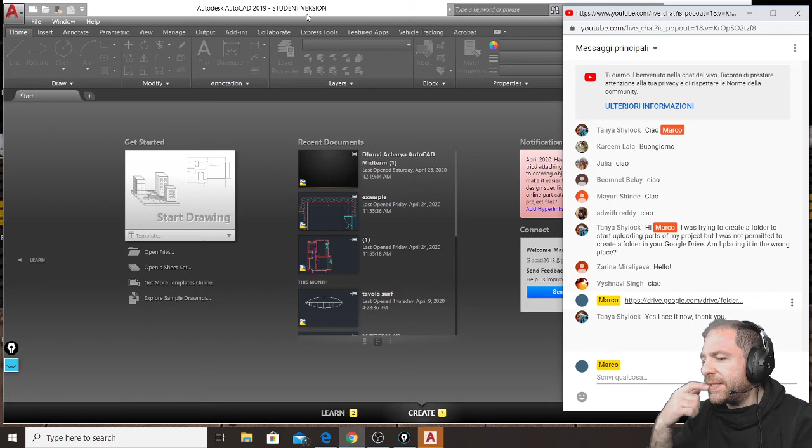Something else? Do you have doubts, things that you want to ask me? Because in the meantime, I can make a new file. It is time today to explain sections. So let me know if you have questions, because if not, I will show you the concept behind, like we did last week. I will really draw a lot on the board before doing the operations in AutoCAD.

Should we also place the furniture in the plan? Of course, yes. You have to place furniture, and you can use, for example, blocks for furniture. You can download them and use them inside your floor plan. You can't just make a floor plan and say, this is the kitchen. We need to see how the kitchen works, so where is the sink, the fridge, and stuff like that. Okay?

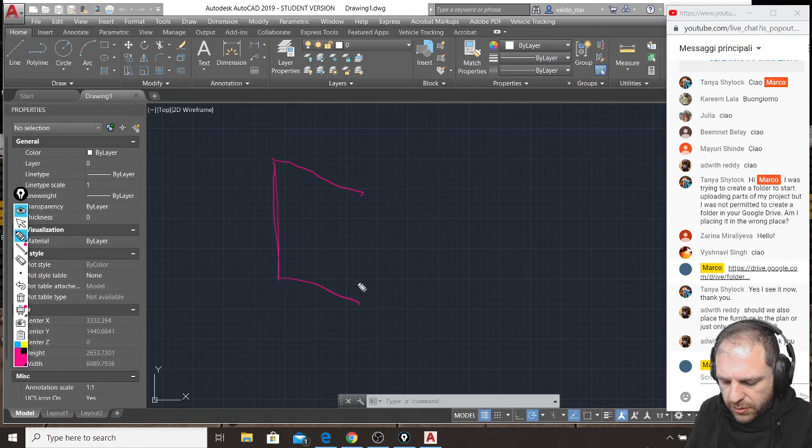First of all, what is a section? A section is nothing else than an elevation, so the concept is the same. The only thing that changes is that instead of being outside an object, the section is an elevation made by being inside that object. So the real difference between making an elevation or a section is only this. Let's make a pyramid, it will be more visible. So let's say you have a pyramid.

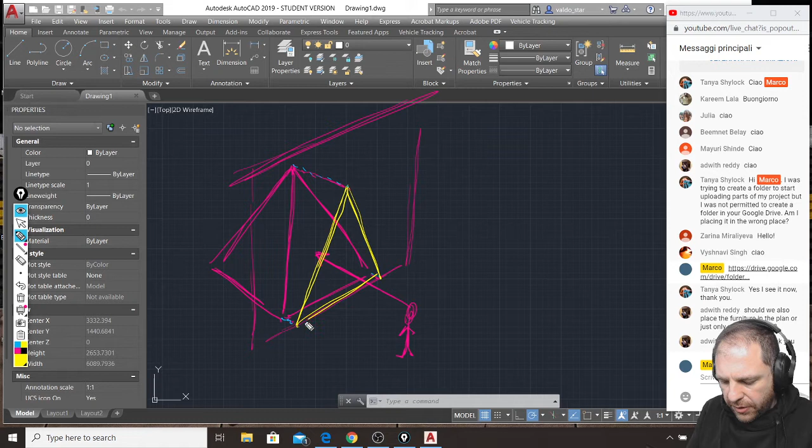If you make an elevation of the pyramid, imagine that you are here. This is your viewing direction. Because the paper where you draw is on a plane perpendicular to your viewing angle, making an elevation basically means projecting these vertices on your viewing plane, and you will see a triangle as the elevation of this pyramid. This is simply because you are outside the object, and your visual plane is outside the object itself.

No! The pen fell on the ground. Give me a second. Where is it now? It's there. It's a disaster. Sorry for the real-time inconvenience.

So I was saying, this is called elevation.

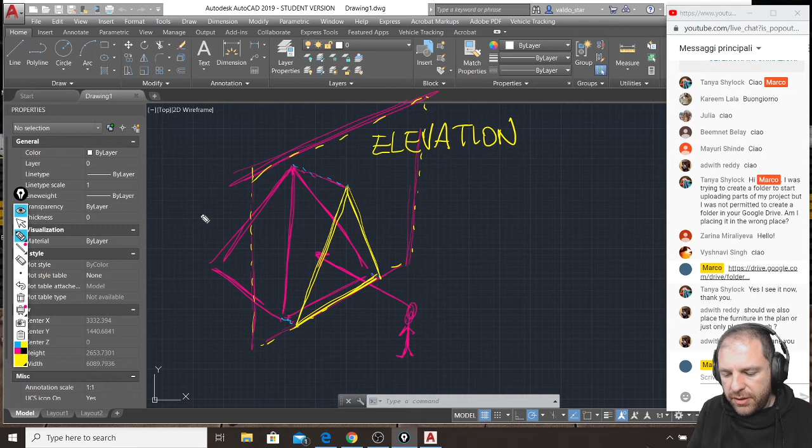What happens when I want to make a section? Believe it or not, the concept is the same. The only thing that really changes is where this plane is. So, check this. I make again my beautiful pyramid. This one.

I place myself standing in front of the pyramid again. So again, this is my viewing direction. The only thing that changes is that now, just by making another color, my viewing plane that is still perpendicular to the viewing angle is intersecting the pyramid. So basically it is cutting this pyramid here, and the intersection between the pyramid and the plane is something that happens here, let's say.

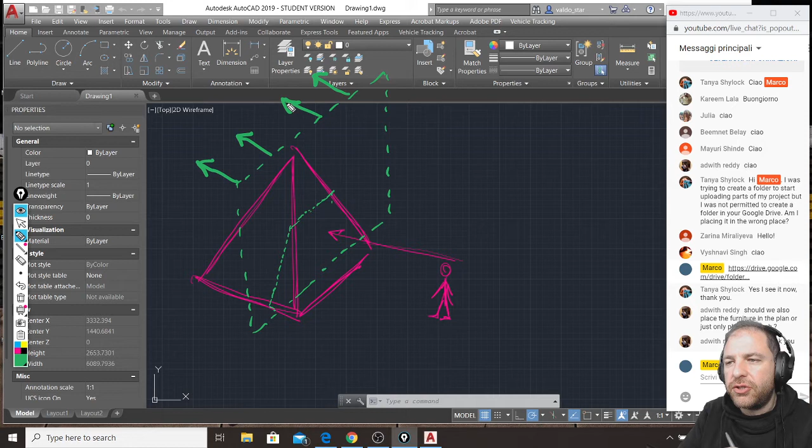So what I see when I make a section is that I won't see whatever is in front of my section plane, and I want to see whatever remains behind my section plane. So what happens is that because there is this intersection between my plane and the pyramid, I will start viewing this as an elevation. But in here, I will see my pyramid cut like that.

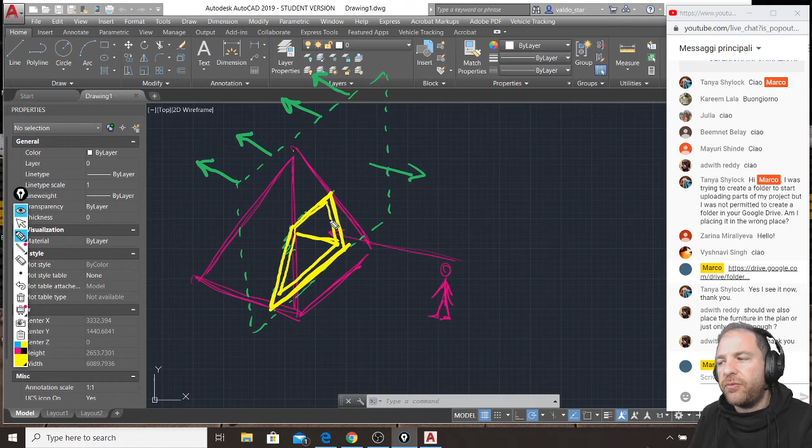And if, for example, the pyramid is hollow inside, I will see what is inside the pyramid, or the element that I have in front of me. So, what happens when we turn this concept into a technical drawing? It happens simply this. We don't draw in 3 dimensions, we draw in 2 dimensions.

So when we, let's say again, have our pyramid and we see it from the top, the pyramid looks like this. We are here, and I will draw the plane in a very precise way. That is, I will draw it with a dash dot line. So when I make an elevation, my point of view is here. I look at the pyramid from here. So when I make an elevation, this is my vertical plane.

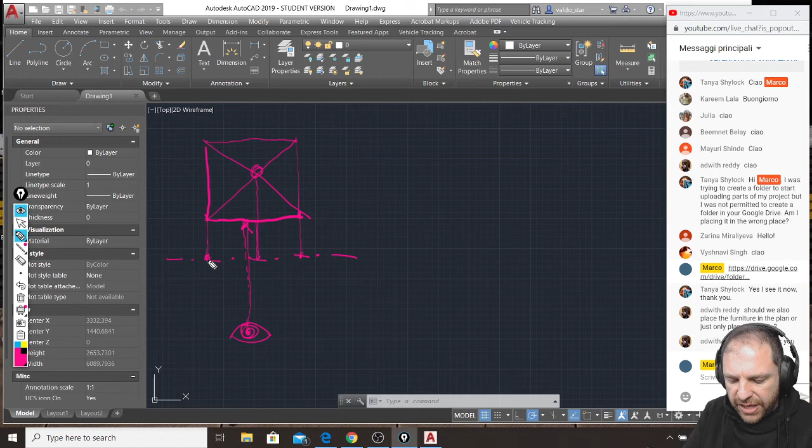I project these points like that, and this will be this point, this is this point. I should know how tall the vertex is so that my elevation becomes a triangle. When I make the section, the only thing that changes is that my dash dot plane is not outside, but it is cutting my object.

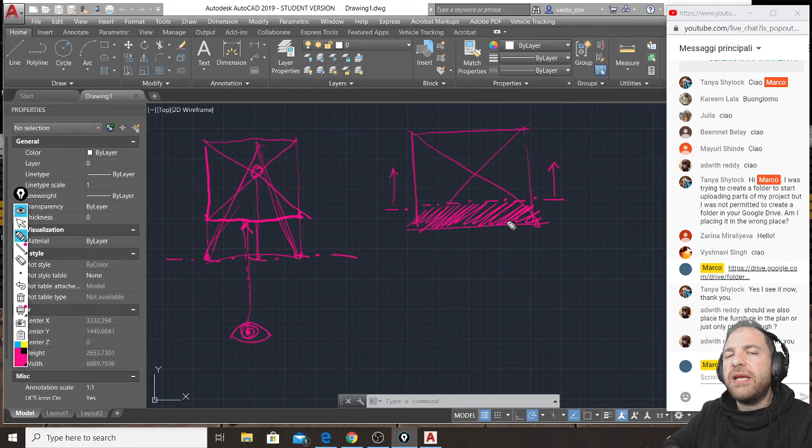So what happens is that I will see whatever remains on this side of my cutting plane, and I imagine that whatever remains in here is gone forever. So when I go to make my projection and I am in this situation here, I have to project only elements that are visible, that are in front of these, and I have to forget whatever is there.

So I will not project these vertices anymore, but I will project this intersection here, this intersection there. I will project this point because I can see it. I will project these, and I will project that. In practice, making a section is like an elevation, just with this additional information.

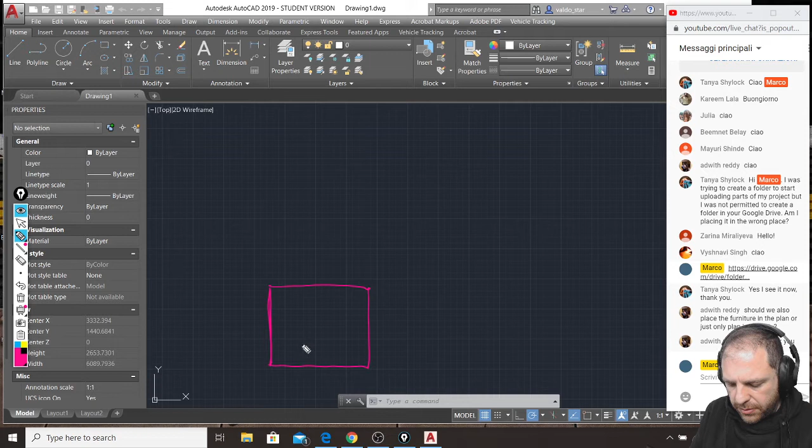So, if I have an object, and again, I just draw it down here, and I see it from the top, this is the pyramid. This is my cutting plane, and I place it here. Mechanically, the steps that I have to do are the same exact steps that I showed you last week for elevation, and we have seen the elevation of a stair. This is the same. The only difference is that I will do this.

On the section line, I will add 2 arrows to specify which side of my object I can see, so the one where the arrows are pointing at, and I will specify which part I'm not able to see. Starting from this simple point, like I did for elevations, I will make a ground line.

And a ground line must be perfectly parallel to my section line. So if the section line is horizontal, my ground line will be horizontal. If my section line is vertical, my ground line will be vertical. But they must be parallel.

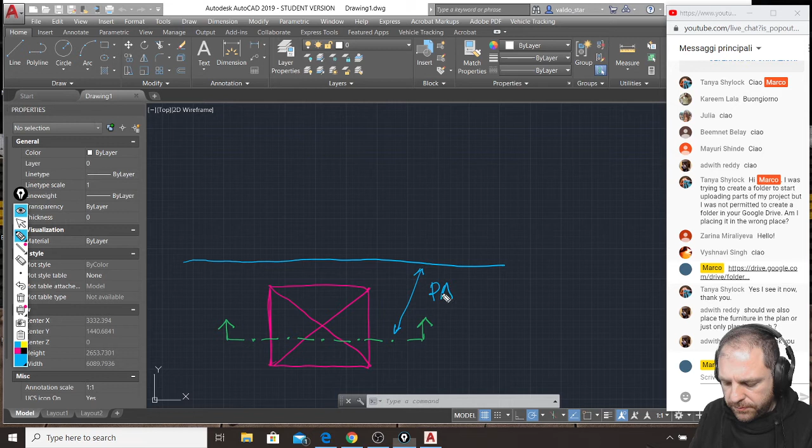Then what I have to do is see which are the points that my section plane is intersecting. My section plane is intersecting this, and this, and I will project them by using perpendicular lines to my ground line.

But besides having cut points, I also have this vertex. There is something that is behind and is in front of my section plane, so I can see it, and I will project this thing as well. So what happens is very simple.

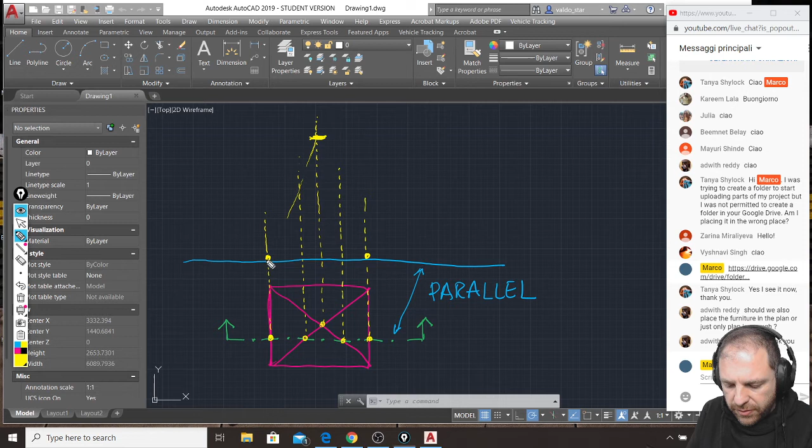It happens this. What I have to understand is that my pyramid, let's say, will have this height, and the pyramid is touching the ground here. So I should expect that the shape of the pyramid will be like this.

But there is something more. From this part, something is visible, and this visible part is basically what remains from my vertex till this point. That is the projection of these 2 points there. So this is something that I can see. So it will be a small part of an elevation, while in here this will be the section of my

pyramid. And when I draw it, I will draw these with a thin line, and I will draw, let's use another color, I don't know, this one, no, green, I haven't used green, and I will draw this part as the cut element of my pyramid.

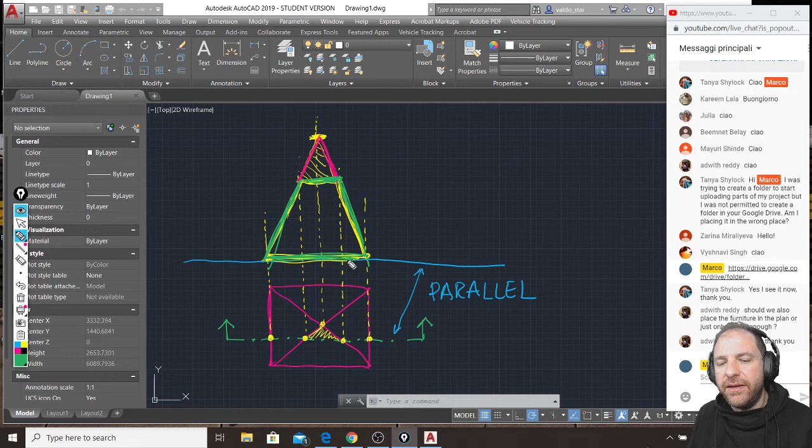If we do this and we apply the same concept to a house, it would be unbelievable. Let me show you first in 3D, then in 2D again. If we have a house, what is technically called the section will be the green part, but the drawing that is called section in technical drawing is whatever is cut plus whatever is visible. So you have to draw both elements. I will show you better with a house example.

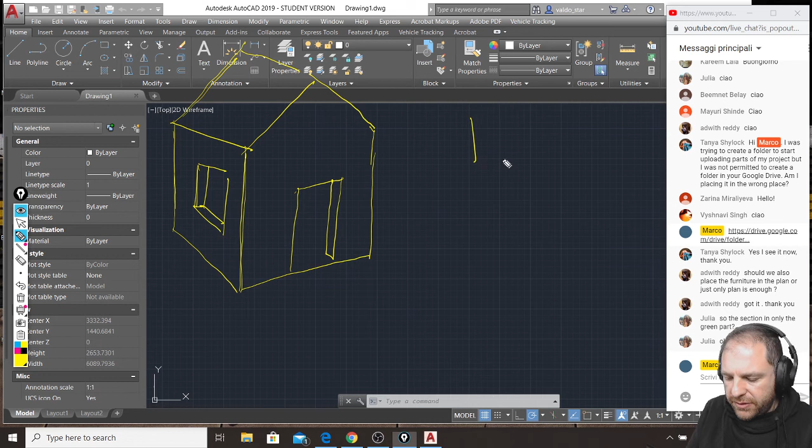But see this. This is your house. If I make an elevation of this house, it will be very simple because it will look like this. I can just see this front face. If I make a section, let's say my section plane is cutting the house in half, and the intersection between my section plane and the house is cutting the house like this.

It goes on the other side, so it goes inside the house. I will see roof thickness. I will see this other part of roof thickness. I will see this wall. I will see floor thickness, and I will see this. So this is where my section plane is cutting my architectural object.

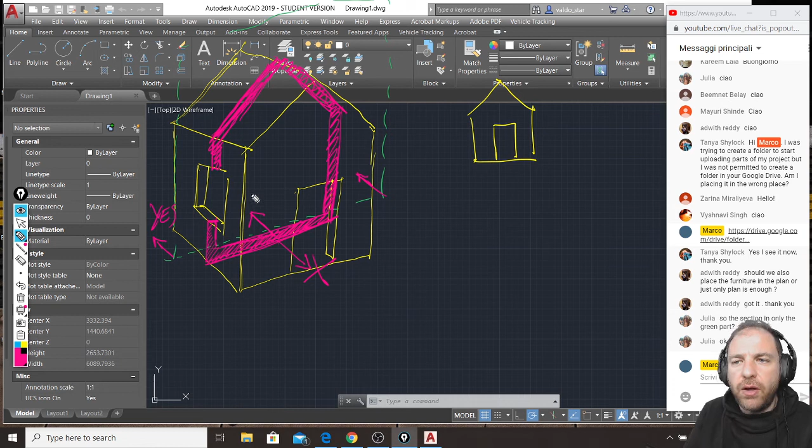But if I have things that are on this side of the house, I won't draw them. But if I have elements on this side of the house, that is the direction that I have set for my section, so here no, but here yes. So if I have a table in front of my section, I have to draw the table, as well as the edges of my window that I can see, even if they are not cut.

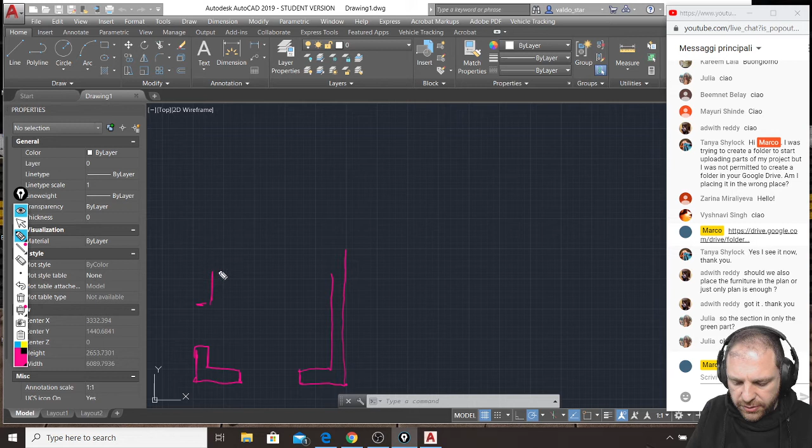So let's see how to go from a floor plan to a section, and I will draw this house section. If I make a floor plan of this house, it will be like this. There is the door. Here there is the wall. Here there is the window. And I said window, so I have to make these two lines in here. This is the door, so I have to draw it like this.

Okay? And because the roof is angled, I will also draw this dashed line to show where the slope changes, where the center of my roof is. So if I want to make my section, I have to place my section line, which in reality is a cutting plane, and I will add 2 arrows to let people understand where I am looking. Once I have this information, I'm ready.

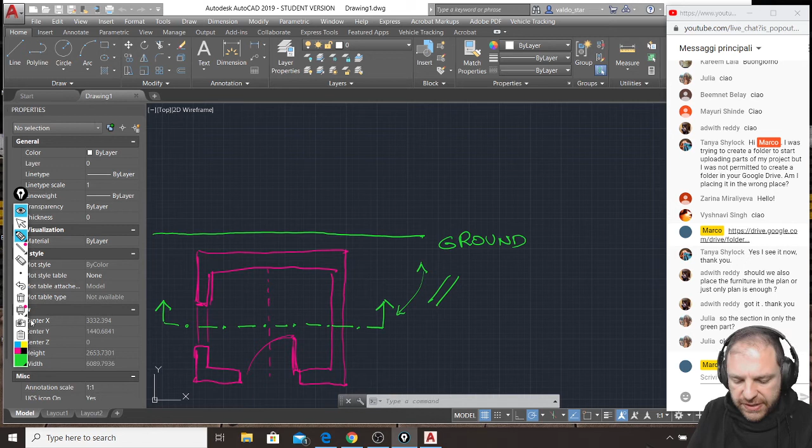I can make my ground line. So this is the ground. And again, this and these are parallel. In my house, in here, there is a table with 4 legs. And here there is a chair. So when I make my section, I need to do this.

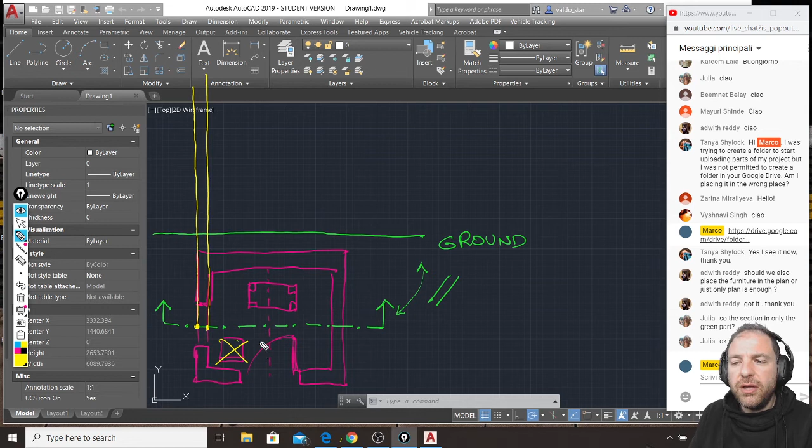Starting from one side, I can see that here my wall is cut by the section line. So I can see this edge. I can see this other intersection. I keep going and I see that the chair is behind my section plane. So even if there is a chair, in this particular section the chair won't appear. The door remains behind this plane, so again, it won't appear in this section.

But I have this part of the table. This is visible because it is in front of my section, so I will project it. And I will also see the legs of the table. So I will start projecting all these lines. Then I can also see that on top my section is cutting the roof, so I will also project the middle line, where the roof is. My section is also intersecting the wall in these 2 points, so I will project these and I will project that.

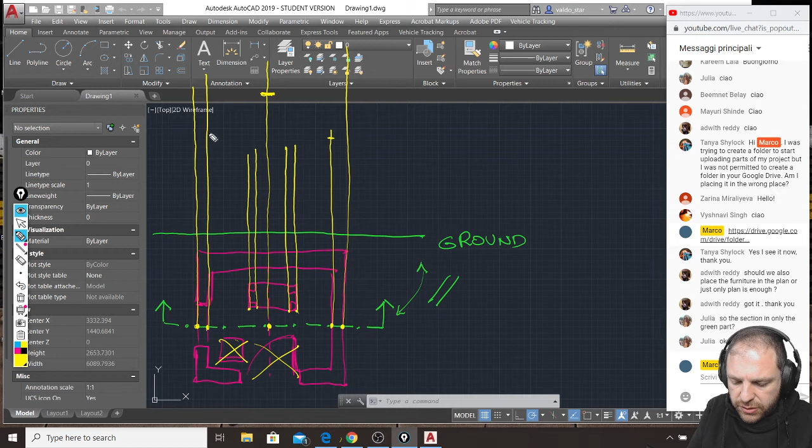Now I need to consider the height of all these elements. So I will start, let's say, with the roof. I've measured that the roof is 4 meters, so I will stop the roof in here. I know that the height of my walls on the side is 3 meters, so I will stop them here and here. And because my house has this sloped roof, inside it will be like this.

But walls have thickness, so the roof has thickness as well. So the same thickness that I have in my wall is something that I have to offset and find outside my roof. Then here I have no windows, so the wall will go till the ground.

Here, instead, it is a little bit more complex because I'm cutting a window. So what I see is this. I know that here, this is the wall in section, so it is vertical. But it is also true that these points that I have projected are the lower part of my window, which is at 1 meter of height. In floor plan I don't see them, but the window doesn't go till the ceiling. The window has a certain height, so I have to make another line here.

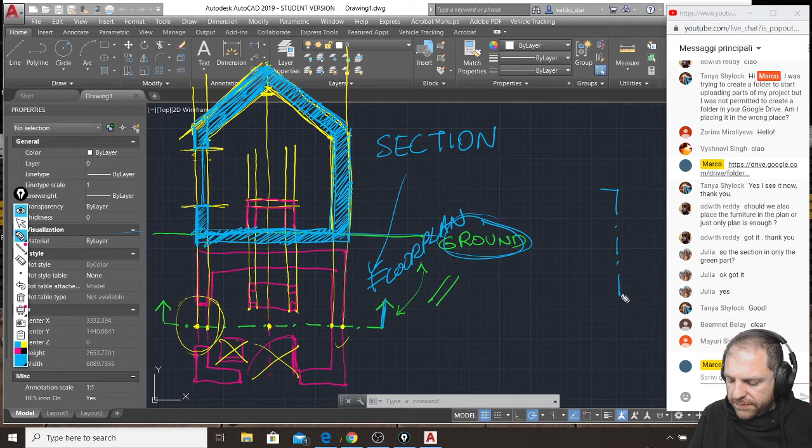But if I was making a section that is vertical and pointing to the left, I need to make my ground line like this, so that when you construct your section at the beginning, the construction will have this orientation. It is rotated, okay? So this, for example, will be this section here, where I can see that there is a door, and my section will be like this. This is the ground, this is the door, perfect.

At the beginning it is rotated, so you really build it at a rotated angle, and these are instead just in elevation, so you must draw them with a thin line. You have to draw it like this, but when you make your final drawing, at the end of the construction, you will rotate it to have the right orientation and not be forced to look at the drawing by bending your neck. Okay?

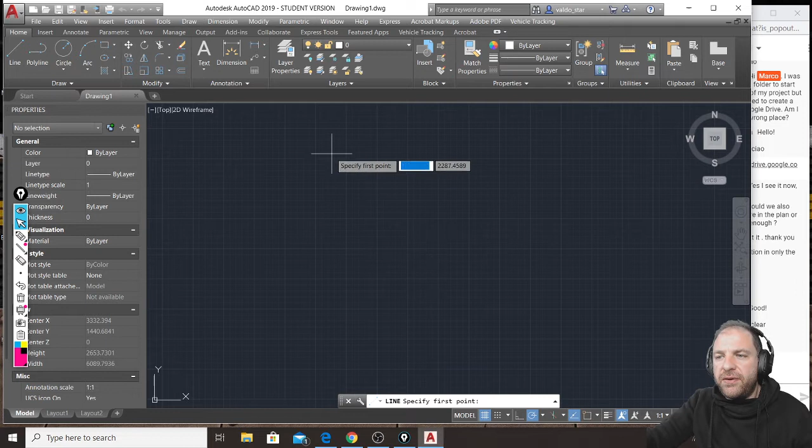So 2000. Okay, this would be 300. Okay, I mean, nothing impossible. 300. Okay, so I'm just creating a floor plan that has more or less realistic dimensions. Okay, so this in millimeters should be like a small house, and it will have 2 rooms.

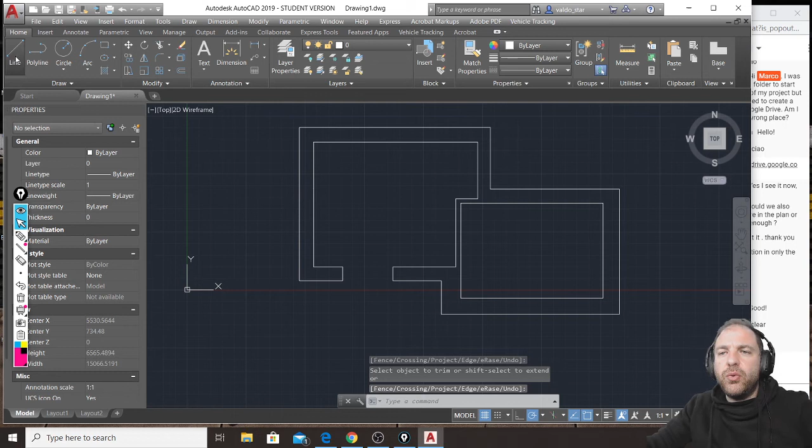Okay, so I'm not using any dimension, but I started just at the beginning by using dimensions simply because the overall precision is not really important, but at least it has to be something that makes sense in a realistic dimension. So exactly, let's say you have these, these are two rooms. In here I will place a door. I don't even mind how big the door or the windows are, but just realistic in millimeters. Okay.

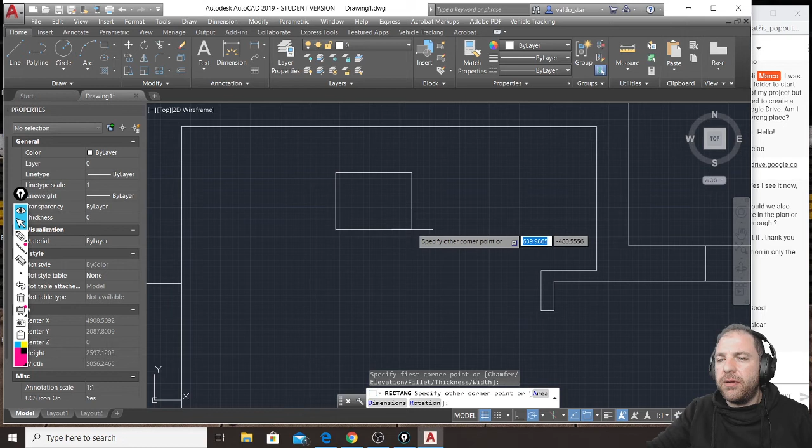So I've made this architectural masterpiece, but this would be insanely beautiful simply after putting, as I said, a table in here. So I will put a table. The table will have 4 legs. And I use mirror to add legs. But if I keep it like this it will be boring. I want to spice up things a little bit, and I will put the table like that. Because if not, let me tell you, it would have been too easy. Almost boring, I would say. So, see what I do now.

I have to make a new layer because section lines must be, even in AutoCAD, made with a dash-dotted line. So I make a new layer. I call it section lines. Besides the color that should be changed, the most important thing is that in the line type you have to load this one, the one called ISO dash dot, and you have to select it. So I make my section line in here. That would be a very complex point because this line will cut my window, it will make this table visible, it will cut this door, it will make this window visible, and it will cut this wall here. So this cannot be continuous. I have to move it to my section lines layer.

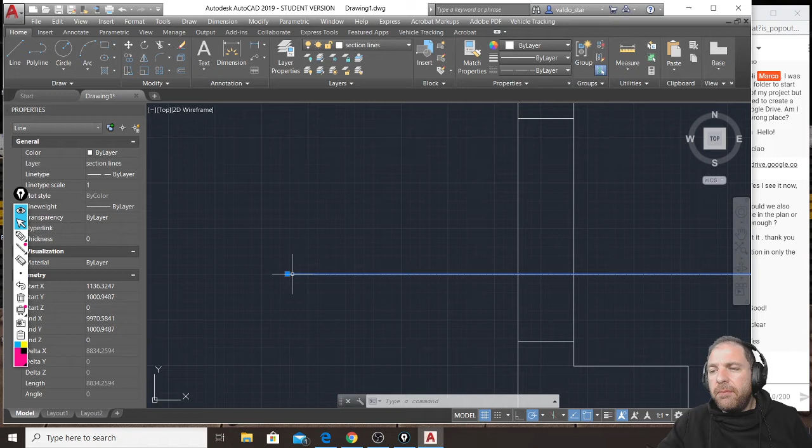After doing this, I can see that this line is dash dot, but the scale of this line type is too small, so I select it. Like I explained last week, I go to line type scale in the properties and I increase it, let's say 4, even 5. So that I can see that this is my section line. I need to tell myself first and my viewers the direction that I am using. So I will add an arrow here, and there is no need of being extremely precise, just an arrow here, but then you have to copy the same arrow from this vertex, from the beginning till the end of your section line. So even if I see a partial view of my house, this must be clearly visible. So section arrows are at both vertices of my section line.

Okay? Till here? Let me see the chat. Till here, everything is fine?

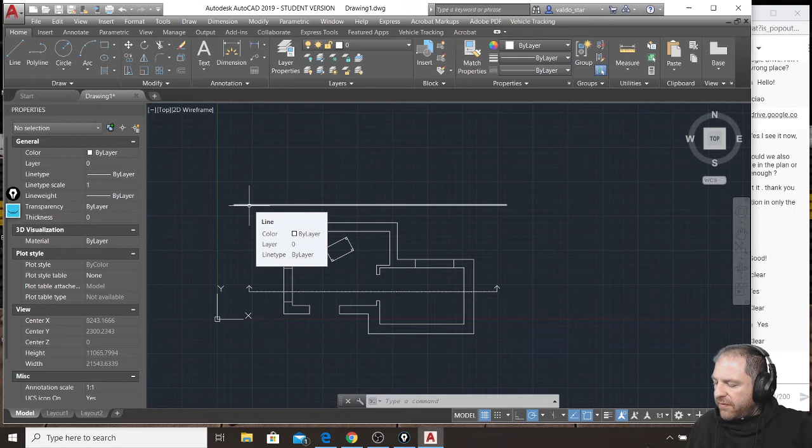Perfect. And now the fun begins, because what I have to do is draw a line in the same direction the arrows are pointing at; this will be my ground line. And I have to start from the left. I have to start thinking this. Look, starting from the left, this section line intersects my wall here. So I point my mouse in here. I make a line that is perpendicular to this direction. And this will be the projection of this point. So let me highlight it like this. It is the projection of this point. But on the same line, I can see that there is also this point. So they are just matching.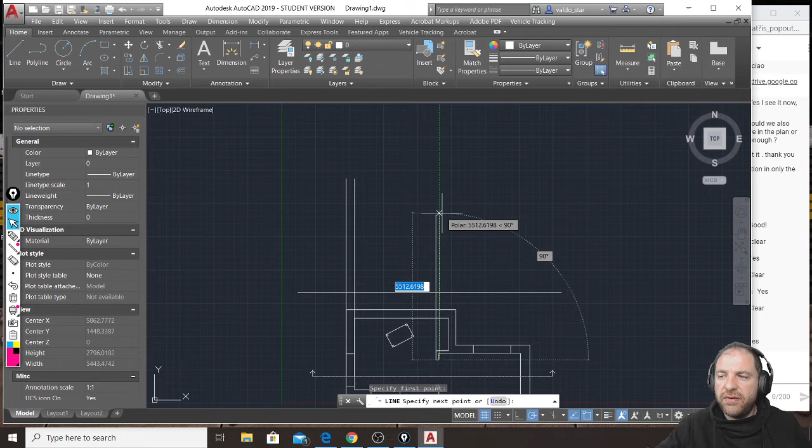Then I will keep reading where the section is intersecting my house. So next is here. So I click in here and I project this. I will make the table afterward, but let's continue by reading walls. So the question is, my section is here. So if I am here, for you, can I see this edge of the door or not? I will answer. The answer is yes. I can see this edge. So I click it and I project it. I can see this. Yep, exactly. Yes. I can see this one and I project it. But now I won't ruin the surprise. But if I am here, for you, can I see this edge of the room? Yes or not?

This one. I will see the chat.

So can I see this edge of my room or not, if my section is here? No, exactly. Nope. So I won't draw anything. I will keep reading what my section is able to see. It is able to see this corner of the window, and I will project it.

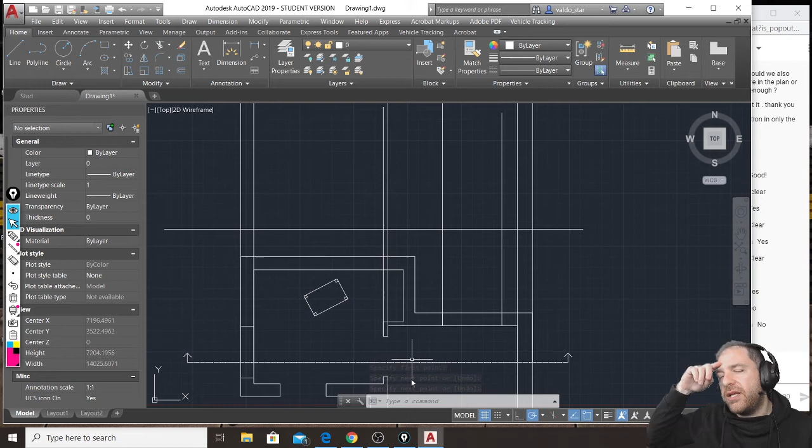This corner of the window. This intersection with the wall, and this intersection with the wall. So for now, I have projected all visible elements that are in the structure of my house. I have skipped the table just for a second. I will do it later.

And what I need to understand now is simply this. This is my ground. So this is where I will be, like this. Okay, I'm standing on top of here. So this is where I have my feet. So this is the height that is 0. But all points that I have projected, they all have a different height.

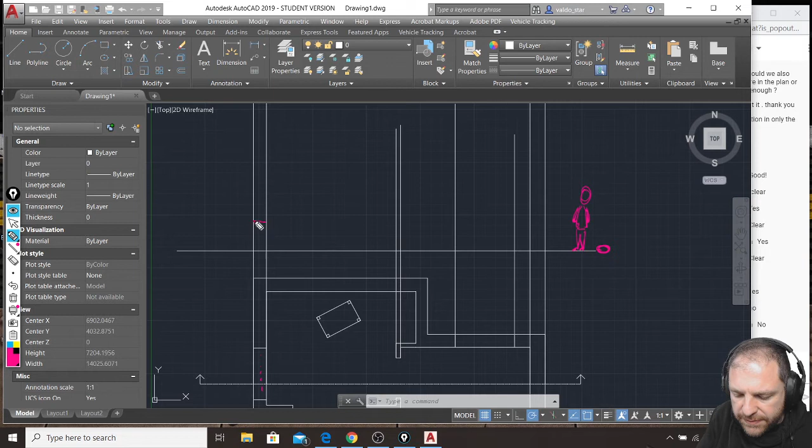So I need basically to understand that this part of the window has wall from the ground till a certain height. Then I can only see these edges. But then after a certain height, the wall will start again. So what I have to do is, by following these simple rules, I have to start setting the height for all my elements.

There are multiple ways to do it. Last week we've seen... No, I deleted myself too. It's okay. Last week we've seen one way for stairs, that was: I draw a line in here and then I move it or offset. Do whatever you want. It is fine. For example, I like a lot to use offset because I can type height for my objects.

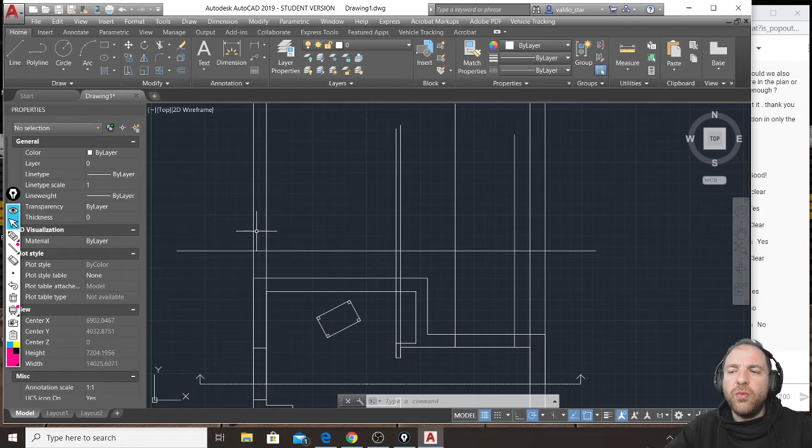So for example, if I know that the window starts at 1 meter and ends after an additional 1.5 meter, what I will do is I click offset. I'm working in millimeters, so 1 meter is 1000. I select the ground and I offset up. This is basically like the balustrade height of my window.

Then I make another offset. Let's say the window is 1.5 meters tall, so I type 1500 millimeters and I offset this part in here. And then by selecting these two lines, the wall lines where the window is, I will trim the excess of these two lines and I will just keep that small part that is inside.

I will do the same thing here where I have the door. The door is 2 meters tall, so I go to offset. I type 2000 and I offset the ground up. And by selecting those two lines that are my door, I will trim the excess of this height.

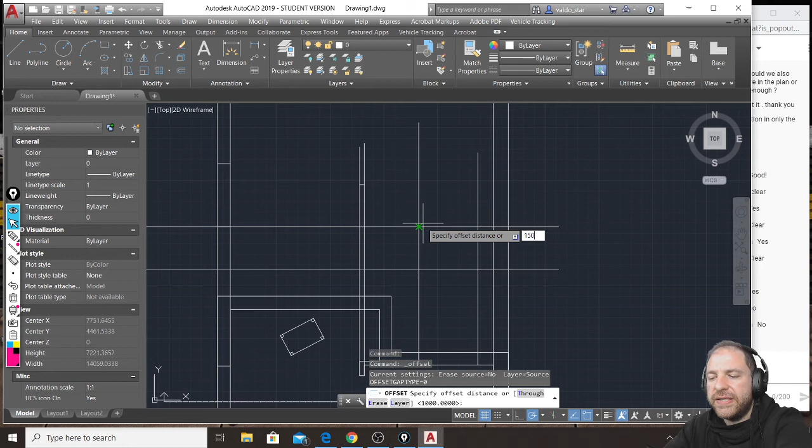In here, I have another window. So let's pretend that it has the same dimensions as my previous one. So I will offset 1000, sorry, not 1500, my ground line up, and then offset this line 1500 up.

And now, because this is not starting from the ground, this is a window, I will select both couples of lines, projections and height lines. I will click trim and I will trim all the excess of these 4 crossing lines. And this is the window that is not cut. This is projected, so this is visible in elevation, but it is visible from here.

I have almost done, and I need to understand something, that is, when I am inside this room, where is the ceiling height? So till where the room can be used. Let's say it is 3 meters, that in millimeters is 3000. So I click offset, 3000, and I make the offset of my floor up, and how unlucky I am, these are not touching,

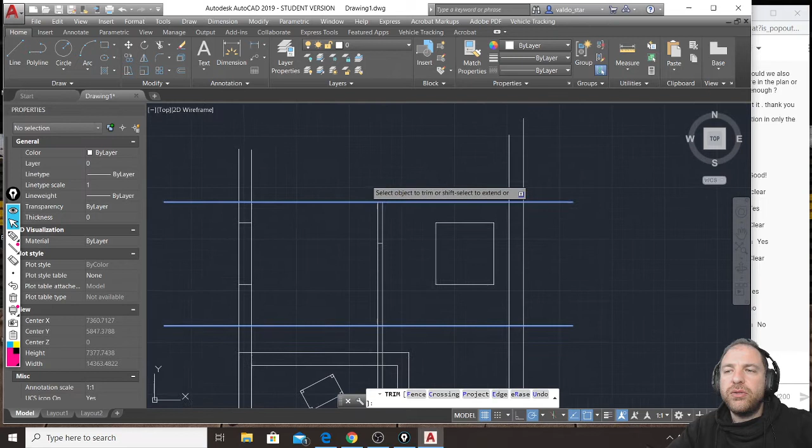but this is where the ceiling arrives. So my walls are reaching the ceiling and they are starting from the ground, so I will select the ceiling and the ground together and I will trim the excess of my wall above and the excess of my wall below.

And I have almost done, because my structures are the floor underneath and the roof above. In this case, let's keep it flat. They can't be just two lines. They must have a structural thickness. And measuring the thickness of a floor is very complex. You should drill a hole and measure it. So just use the same offset of your outer wall.

Let's say this was, I think it was 300 that I typed when I made the floor plan. So I offset 300 and I offset ceiling up, floor down. And I finish by connecting, and this is beautiful, inner wall line with lower ceiling, inner wall, lower ceiling, and I trim.

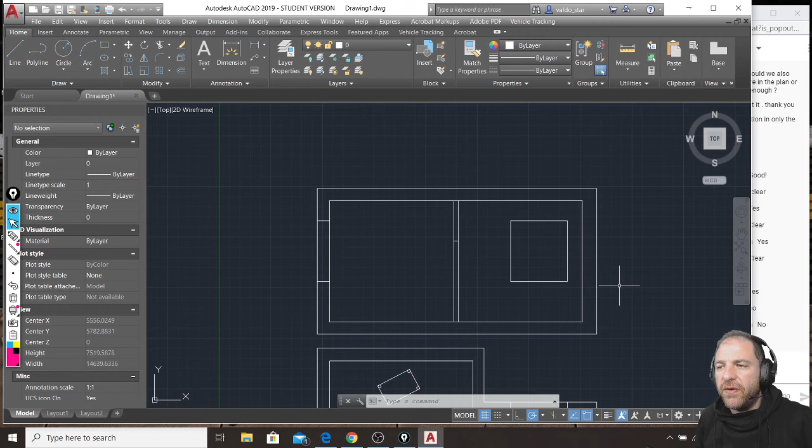There are two more things that I have to do, but they will be beautiful. First thing that I have to do is understanding this. Where I have a window that is cut by the section, the window and the wall are continuously cut. So in here there must be no line. Same below the window, same above the window.

And the same aspect happens only above the door, but not below, because if this is a door, in here I can walk through, so there must be no interruption, while above, this small tiny segment must disappear. So I will select this line, I will click trim, and I will trim this small part in here.

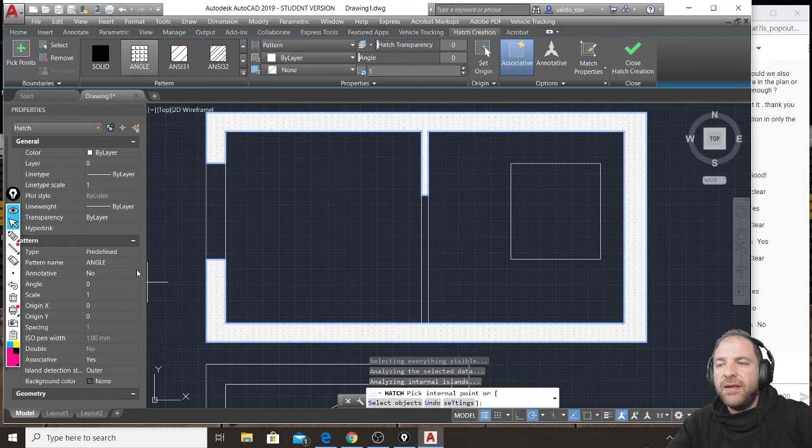If I am right, when I put, let's say, hatch to make my cut part more visible, hatch should stay inside my walls, inside the wall on top of the window, inside of the wall on top of the door, inside the continuous walls, underneath the ground. But if I am 100% correct, I have to see no hatch where the door is cut by the section and where the window is cut by the section. I will just use a nicer looking hatch like this. I close it and I have basically finished my section.

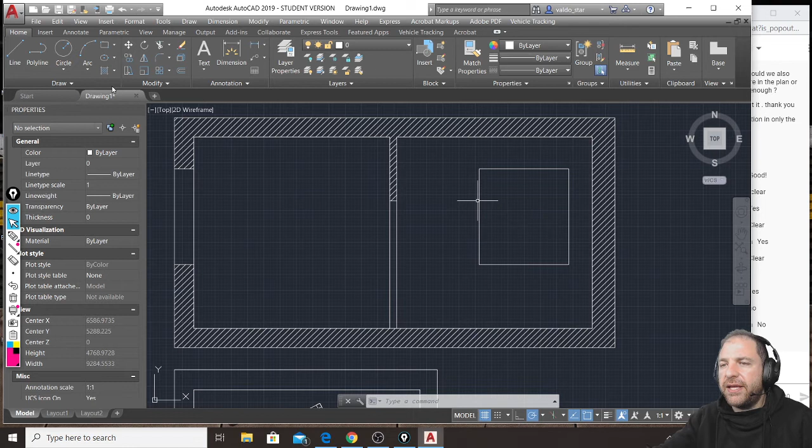I have only to add a few more details just to make it, I would say, prettier, but more or less I have finished it. So what I will do to make it prettier, I will add a few details, like I will add here, if this is, let's say, like a double window, I will add these rectangles. You can be more precise, but it is not really important. But I will add these two rectangles to see that there is the frame and there is a window.

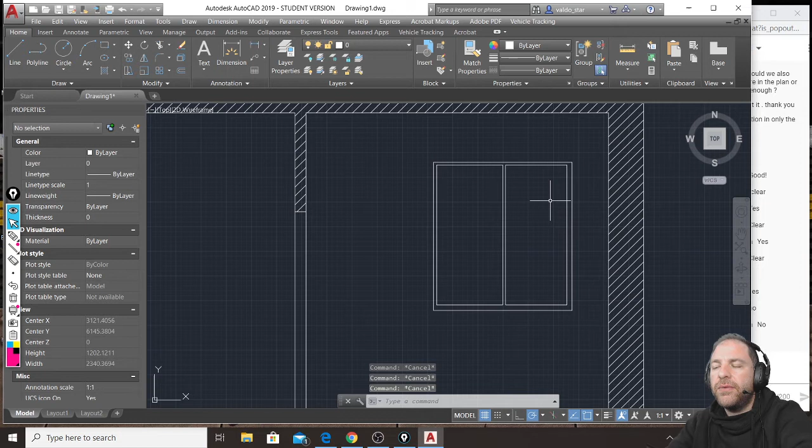As well as I will add a rectangle with a line and another rectangle here and another rectangle here and one line from midpoint to midpoint. This is just a way to tell that here there is a window that is cut, and this is the frame of the window. This is the glass panel, but this is cut by the section line, and this is instead in front of my section line.

And I've done this because someone, I don't remember if by mail or last week, asked what if I have glass panels in elevations. To show that this is glass, you just need to add hatch inside. But you have not to use the same hatch that you have used for sections, while you have to use a hatch that is called, let's see if I find it, this one, AR-RROOF. You use this one. You have to angle it 45 degrees. Okay? And if you want, you can change a little bit the size.

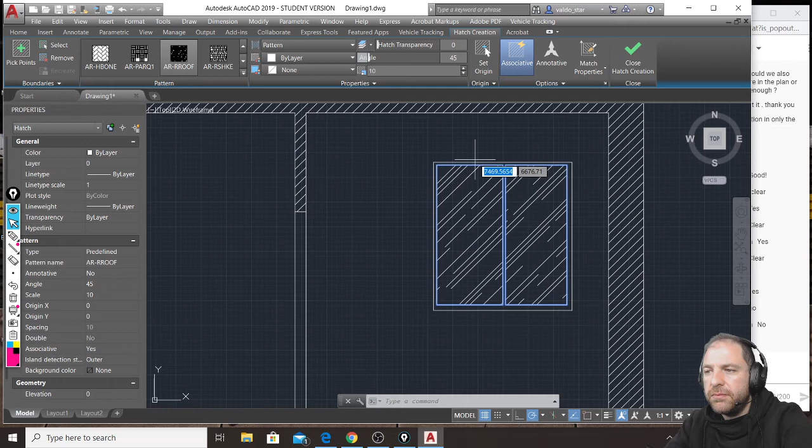So let's say if I make it a little bit smaller, like this. And this is how, in technical drawing, you display glass panels that are visible, while where they are cut, you just draw them like one single line. Okay? Till here? Because what remains now is just drawing the table, and the table will look amazing, I promise you. So, till here. Is it clear?

Very good. I'm so happy. I mean, very nice.

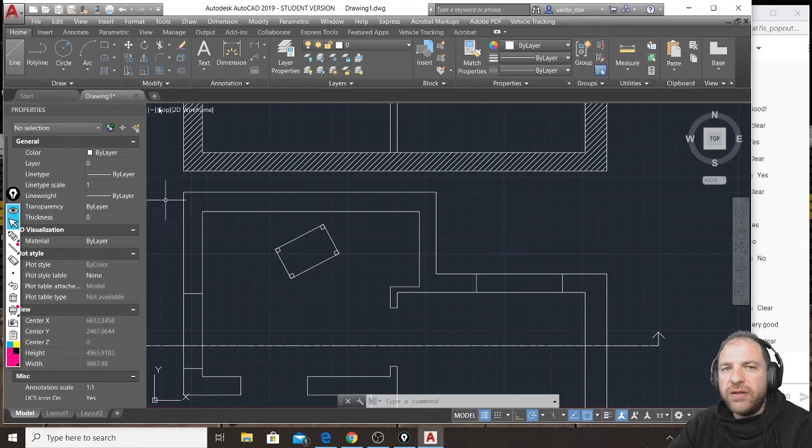So, if this is clear, let's finish the section by drawing the table. The table is in front of the line, so it is visible, and what I have to do is treat it like I have done all these other elements. So, what I will do is I will start understanding if I can see this edge from here, and the answer is yes. So I will click it, project it. I can see this edge of the leg of my table. Yes. I go here, project it.

I can't see this one because it is covered by this face of the leg, so I will just draw this one. And I will keep doing this for all my table legs. So I can see these, I can see that. I can't see this one because it is hidden by this face, and I will keep making this. I will finish quickly by doing this, by doing that.

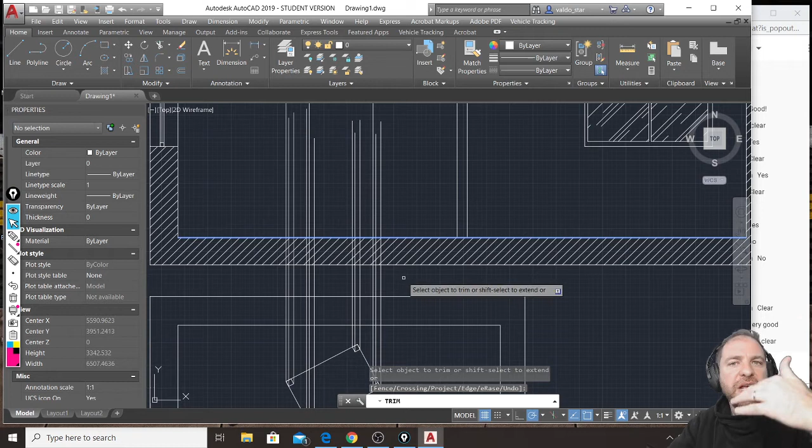This one, fantastic. This, and this. Perfect. So the table is something that starts from the ground. So first thing that I will do is I select my ground line, and I click trim, and I trim whatever goes underneath to avoid confusion. But the table is also something that from the ground has a certain height.

Let's say it is 80 centimeters tall, so I offset. I type 800 because we're working in millimeters, and I offset the ground up. Let's say this is the top of the table. So I select the top, and for sure no legs will go on top of the table. So I will click trim, and I will trim all these elements.

But as my table is made, I can see that the edge of the table matches one edge of each leg. So I can also select these two extreme legs. I can click trim, and I will trim this and that. And I have almost done, because the table itself can be just one line. I mean, even glass tables are very thin, let's say they are like 8 or 12 millimeters of visible thickness. Let's make these even more visible.

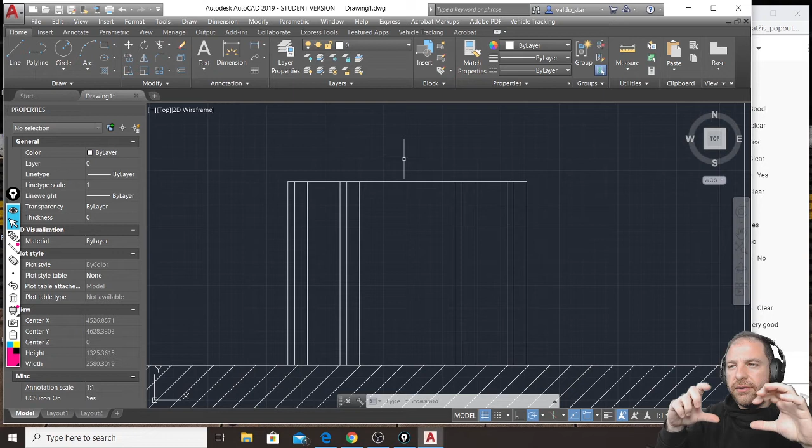Let's say this is a wooden table, so it has the top of the table that is at least 8 centimeters thick. Not because it is 8 centimeters of wood, but because it has edges all around that are 8 centimeters thick. So I will offset. 8 centimeters is 80 millimeters, and I will offset down. But then check this.

I select this line, I click trim, and I will trim 1 and 2, 1 and 2, 1, 2, 3, because this is the back leg, 1 and 2. Because this is the edge of the top that is also the edge of the leg, and I can see that it matches. This is the edge of the top, so is the only one that I will leave.

In here, this edge of the top of my table is hidden, so I can't see it, so I won't draw it. And this one is the last edge of the table, and this is how my angled table will look like in this particular view that is called section. Section because it is cutting certain elements. They are highlighted by the hatch, but I can also see in elevation whatever is there.

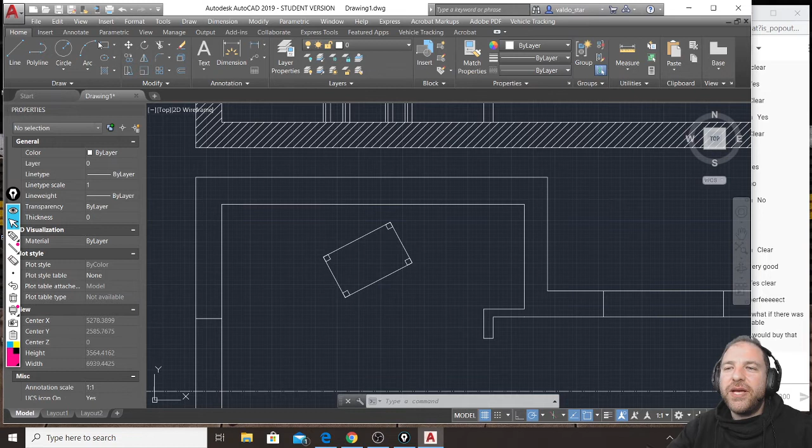So, what if there were a chair? So, let's make a chair. Let's say this is my chair. And again, I just draw legs, even if they are not visible, by the way. So I use mirror to quickly make these legs. And I draw also the back of the chair. Let's say like this. So, if there is a chair, the only thing that changes, no, I don't like this one, is that the process is longer.

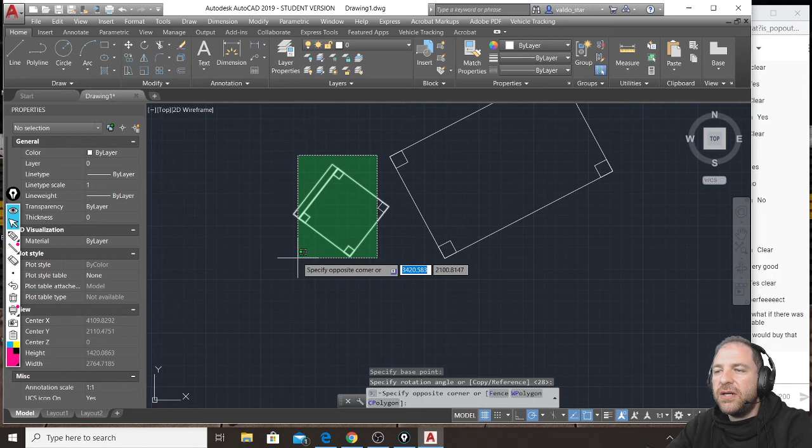And let's make it angled, of course, even with a different angle, like this. So let's say, not only this chair is here, but this chair is there. So very complex. Because in your final floor plan, this part will be hidden. And legs will be hidden too. Okay? As well as table legs. I just have to draw them for construction purpose. And I will simply have to repeat this process.

I want to show you one slightly quicker technique to do it. That is, instead of clicking and drawing, clicking and drawing, once that you make your first line, you can simply hit copy. You can select as a starting point your vertex, and then you simply have to copy these lines whenever you see a visible edge.

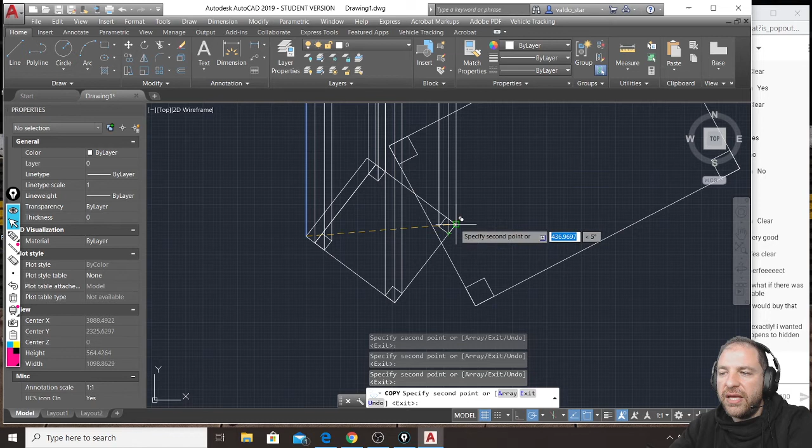If you ask yourself why I've drawn this one because it is not visible, the reality is that this is not visible for the leg, but it is visible for the back of the chair. So, making a chair is only annoyingly long, but nothing impossible. So look, you just offset, let's say 430.

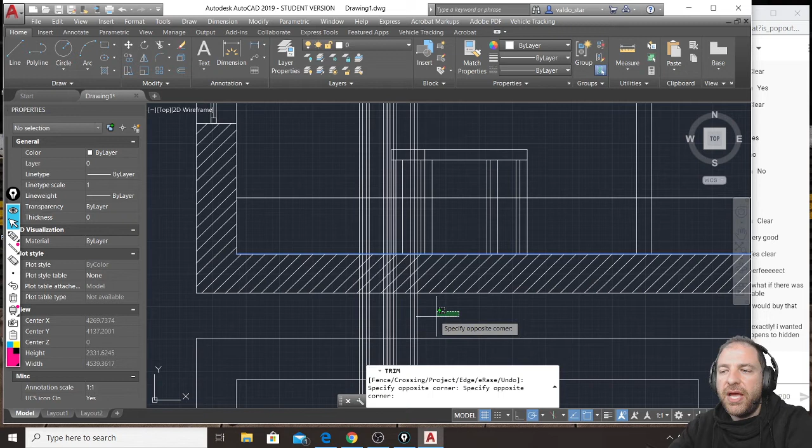Offset 430 your ground line. This is where the seat arrives. Then you can start by removing and getting rid of a lot of lines by selecting the ground by using trim, and you will remove all these lines. You can select the seat, you hit trim, and you will start removing these unwanted lines.

Let me see here. I can trim these and that. Perfect. Here there is 1, 2, 3, 1 in the middle I have to leave. So I have to trim 1. In the middle I have to leave 2 and 3. And all of those. And this as well. Perfect!

So now I offset, like I did for the table, the thickness of the seat underneath, let's say 50 millimeters down, and I will start trimming. So I select where the chair starts and ends, it's here. So I trim these and that. It's just about trimming. I trim these here. I trim these, and that. I trim these. I don't trim these. I trim that.

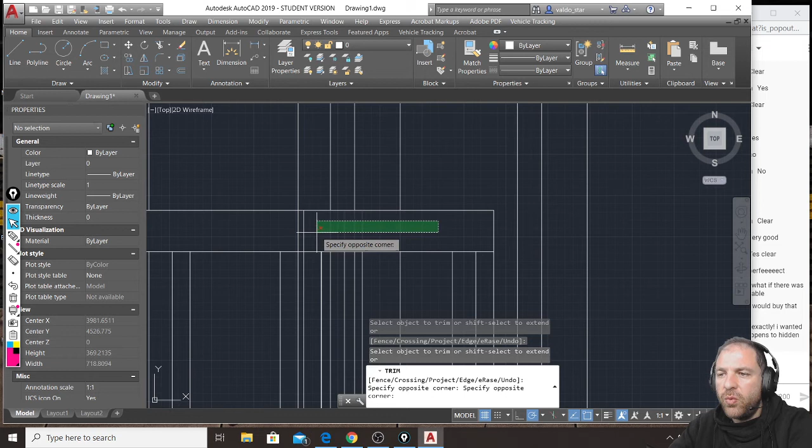Perfect. And I trim whatever is inside the chair, because the chair is covering now this leg of the table, so it will basically stay in front of the table. So I finish by, oops, here I've made a mistake, this is here. And then let's say the chair finishes up here, so I trim this, and here. Boom! And I have my fancy looking chair that is in front of the table.

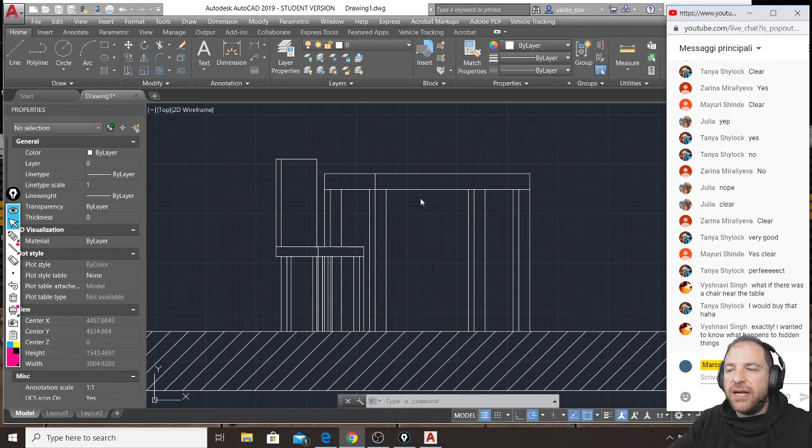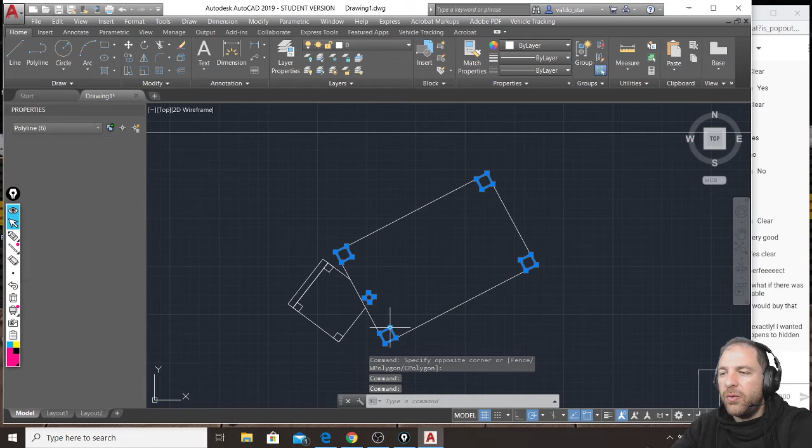Exactly. I mean, there is a hierarchy to understand of elements that are covering other elements. So, if this is the leg of the table, the leg is visible as well as legs of the chair are visible vertically, but the horizontal plane of the chair is covering a little portion of the leg of the table. Okay? And as well as here in the floor plan, it happens the same. Things that are above are hiding things that are underneath. So my final floor plan will correctly look like that. And this is the elevation.

Believe it or not, making sections is not complex in terms of using AutoCAD tools, because if you see, I'm using 3 tools. I'm using line, I'm using offset, and I'm using trim. So in AutoCAD, the level of complexity, let's say, is 0, but it is the construction of the section that requires a lot of attention and preparation. So you must be precise in understanding what is visible, what is not, what is hidden, what is not, which elements are in front, which elements are below. And there are a few more things that you need to know.

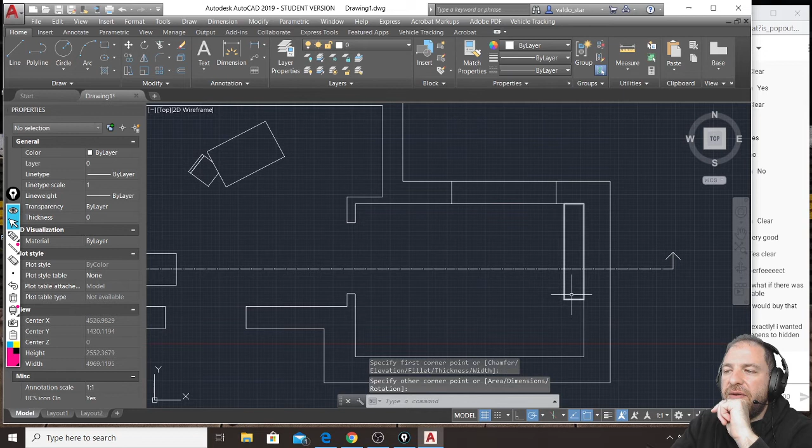For example, rule number 1, if I'm so unlucky that there is a furniture right in the middle of my section line, what I need to think is, if this is a fixed furniture, like let's say in here, imagine if I have a walk-in closet and I have a lot of shelves that are fixed into the wall. If my elements, even if they are furniture, are fixed so I can't move them, like wardrobes, kitchen, sanitary blocks, then yes, they will appear as cut elements in my section.

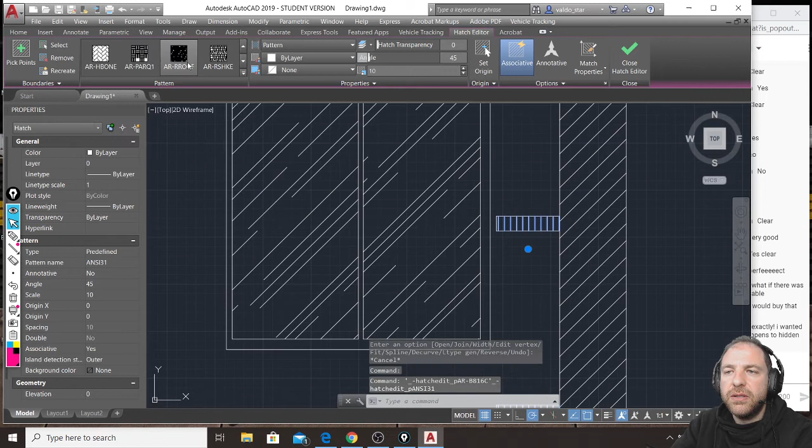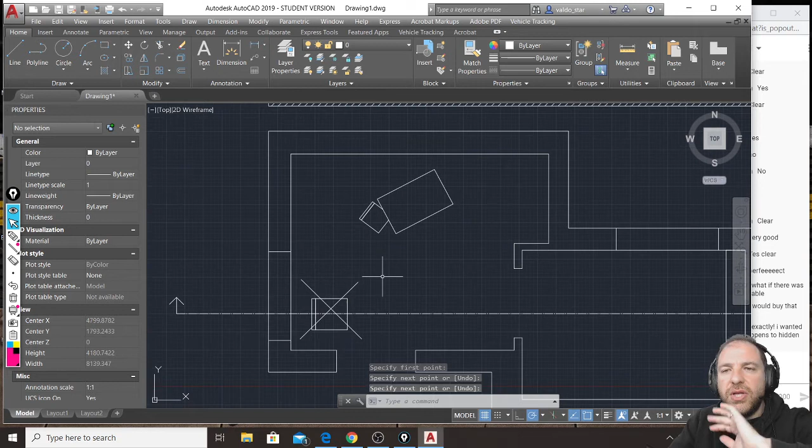So let's say exactly, but not this hatch. I want the one that I've used for the section. This one. 0 degrees. Okay. So if my objects are fixed furniture, I will cut them like they are walls. But if my furniture is furniture that I've placed there, like the chair, it is a movable furniture. So if it is a movable furniture, this object won't appear in my section. It appears if I draw it here, yes, but it doesn't appear if by any chance it is cut by the line or it is behind my section line. This is rule number 1, how to deal with furniture.

So furniture is visible but never cut unless they are built-in furniture elements, like built-in wardrobes, niches inside the wall, and stuff like that. Rule number 2. So, let's write them. So, rule number 1. Furniture. Built-in furniture are cut if they are intersected by the section line. If not, don't show them. That is very simple. It is just this.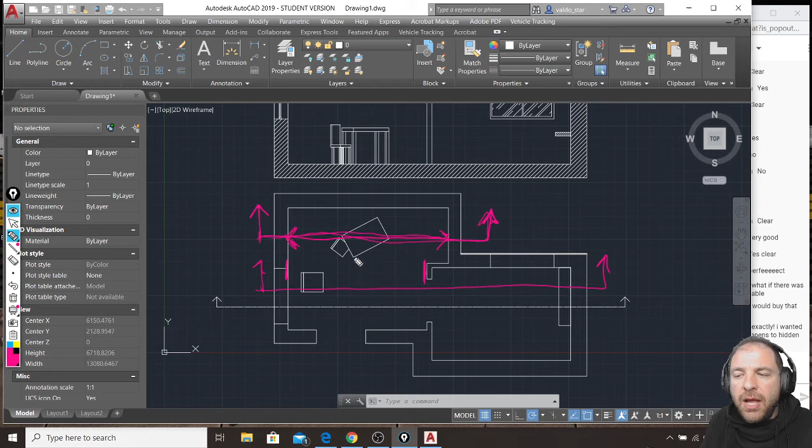but it will be 100% wrong to place a section line here, a section line that goes inside this wall, and this part of my section line, you can see, is parallel to this wall. So my section line is going inside the wall. And again, this position of my section line is wrong. 100% wrong. Okay, and this was rule number 3.

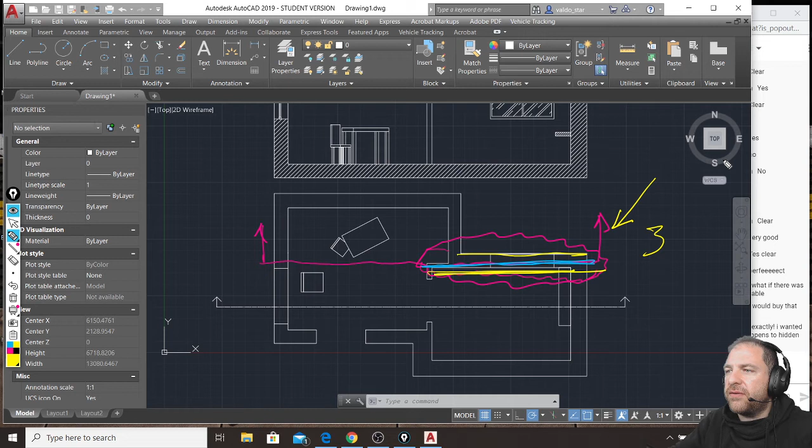There are a few more rules, but till here, are these section line rules clear or not? So, furniture: movable furniture, forget them. Fixed furniture, cut them. Rule number 2, cut as many doors and windows as you can. Rule number 3, don't put the line inside a parallel wall like this. These are 3 major section line rules. There is more. There is this.

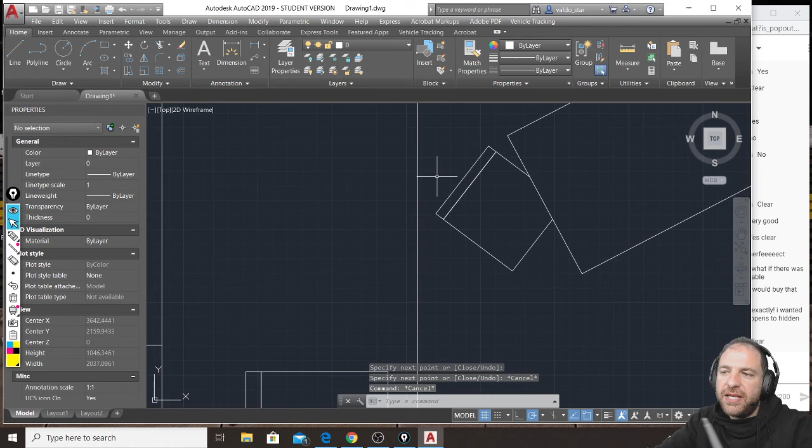Sections must be built by following the orientation of the section line, but then they must be correctly displayed. What does it mean? It simply means that if I want to make this section here, and look how precise I am, making a section so that this chair is not visible, this chair is visible, and the door is cut. But this is cutting vertically.

So when I build this section, I have to repeat all steps that I have done by making my ground line like this. So the rule to follow is always the same. My ground line must be parallel to the section line. I have to project points to be sure that they are perpendicular to my ground line, like these, like that. I have to do exactly the same things that I've done before.

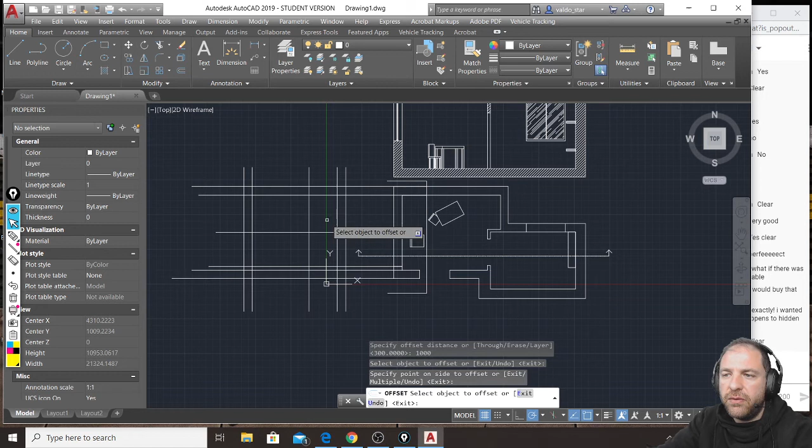This is the door. This is like this. This is the window. Perfect. I forgot the door, so I have to make a last offset. The offset of the door is 2000. So I offset here. Perfect. And I trim these. So this would be the section of this side of the house. In here I should put something beautiful like these, but just to show you.

The problem is that if I see this drawing, it's like I'm reading the drawing with my head tilted like that. So the section must be built with this weird, uncomfortable orientation. But when I am happy with the result, sorry, I zoomed too fast, I have to select it and rotate it, so that at the end I will use hatch having the same orientation of my first section, because if not, the hatch will also be rotated.

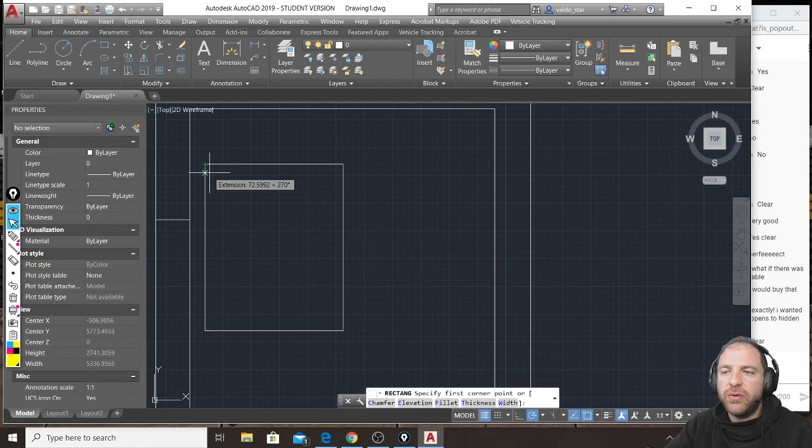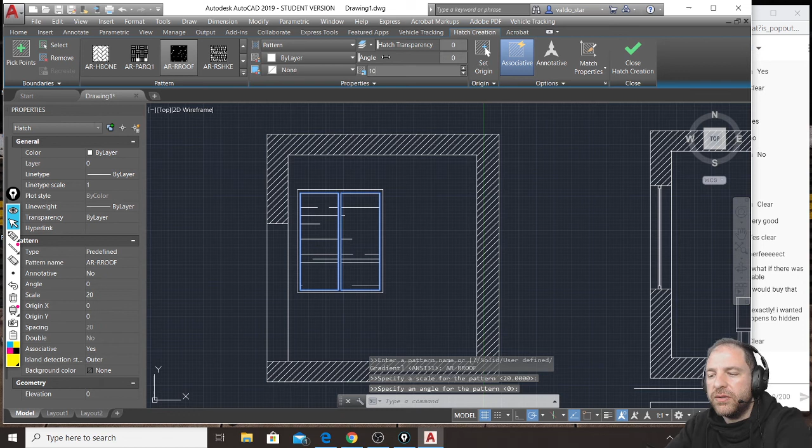So now I will put details and whatever. I mean, I could put this even before, but not the hatch. I will put the hatch when I fix the orientation of my drawing, so I will put section hatch in here. The angle is 0, the scale was 20. Okay. And I will put hatch into the glass, but the hatch was AR-RROOF, and the scale was 10 and 45 degrees.

So only at the end I will rotate the section to have the right orientation in all my sections. So when I read my drawings, I will stand here, I will stand here, okay, and I won't have one drawing that is vertical and another that is horizontal, because when you do, let's say, a section that is looking down, your section will be upside down, and you have to rotate it 180 degrees to correctly orient it.

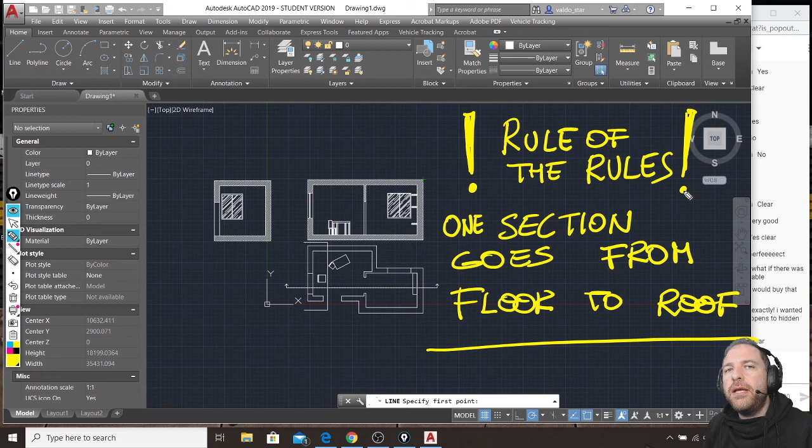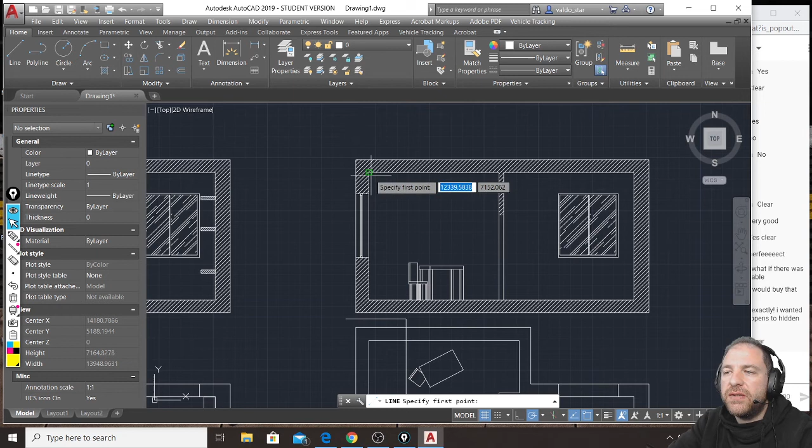So take a picture of these, use this as a desktop background to remember it, because if I have more floors, they are all like these. Let's say I duplicate this one, but let's change something. Let's say in my additional floor I have not these shelves, and I will delete them from here, and maybe the roof is not flat, but the roof will be like this. So just to change something,

I will offset 300 this line, and I will extend them. I mean, it's not 100% precise, but it is fine. Just to show you a quick example. Okay. Oops, forgot the here. Perfect. And I have to remove these. And I have to trim. Shift and click to extend. And trim here. So let's see, this is my last floor.

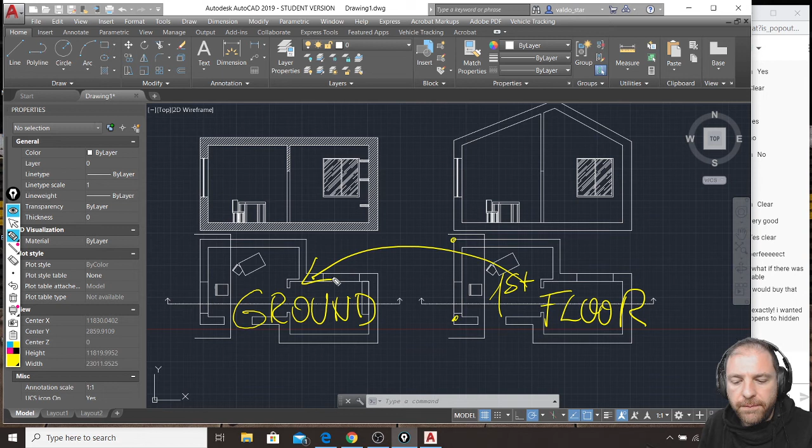What you need to understand is that you will draw these two sections as separate sections because it is more convenient. But your single section will be like in reality. In reality, this is your ground floor, and this is your first floor. In reality, they are not one next to the other. You draw them one next to the other, but in reality this is on top of that. So in your section, you will place

this on top of that by being sure that you don't do one of the most common mistakes, that is this. A lot of people just do this. And this is wrong because what you have drawn in your lower section, this area that for your lower floor is the ceiling, it is also the floor for your next level. So this part and this part are in reality as if they have been drawn twice.

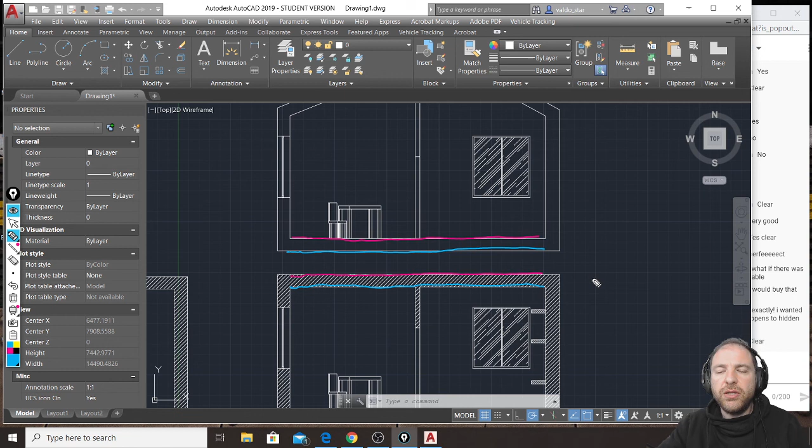So when you put a section on top of another, just remember that this line here in reality is already this line, as well as this line here is already this one. So when you have multiple sections, you have not just to place one on top of the other, but these two lines must overlap. So I will, for now, delete the hatch to avoid confusion. I will move this section so that the top line matches top line and the bottom line matches bottom line.

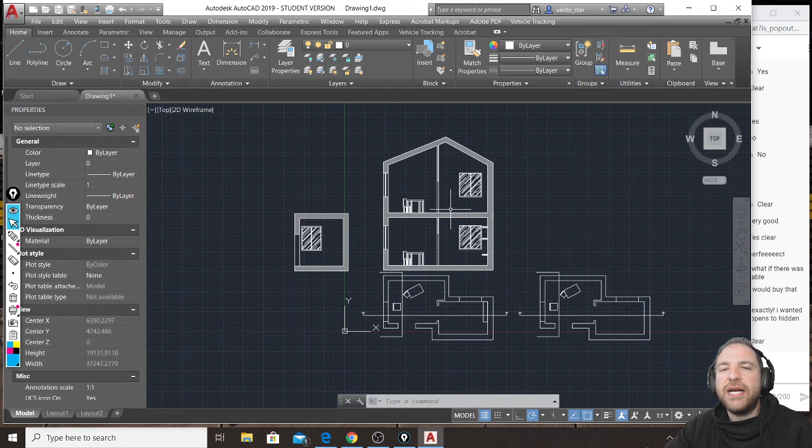Then I will simply delete these additional elements that are just overlapping, and boom! I have my phenomenal single section that is cutting all floors of my building, and I will put my section hatch only at the end of this process. Boom, like that. But don't make this mistake. These are not two sections because you are cutting ground and first floor. This is one section going floor to roof. Okay? Is this clear? Because if this is clear, for today I have finished.

Let me see. Perfect! I'm so happy. So that you have enough elements to start really making very detailed technical drawings about your final projects. And if you have already done elements of your final project, be so nice to upload them into your AutoCAD folder, and send me a message to confirm, because I would like to see what you're doing, so that the next class, by collecting things that you are drawing or would like to draw, I will explain things that are more specific for your interior projects. Okay? Can you do this?